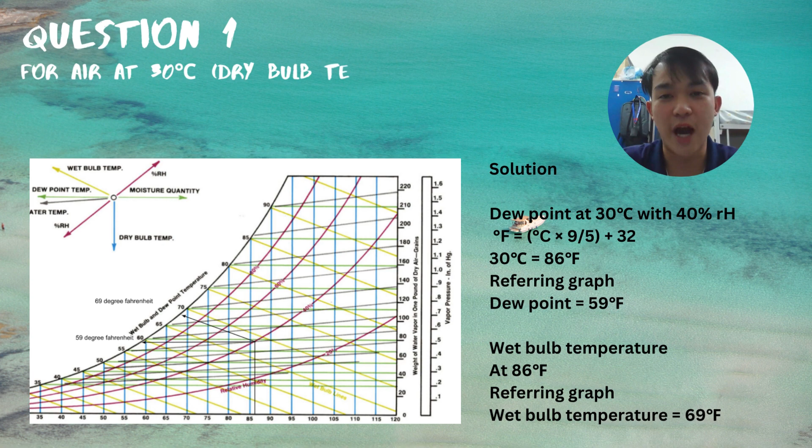So, today I would like to share a topic with a question related to our Chapter 5, Humidification. So, let's look into our question. For air at 30 degrees Celsius, which is the dry bulb temperature, and 40% relative humidity, by using the humidity chart, find the dew point and wet bulb temperature.

So, before moving forward to our solution, let's gain some knowledge about what exactly dew point and wet bulb temperature are. Dew point basically refers to the atmospheric temperature below which water droplets begin to condense and dew can form, while wet bulb temperature is the lowest temperature achieved by the adiabatic evaporation of water in the air until the air is saturated. So, without wasting any time, let's move into our solution.

So, we can see on the graph there are a lot of lines, but I want you all to notice the dew point, which is the green line pointing towards the left, and the wet bulb temperature, the yellow line pointing 315 degrees upwards. So, dew point at 30 degrees Celsius with 40% relative humidity. By using the formula Fahrenheit equals degrees Celsius multiplied by 9/5 plus 32, we get 30 degrees Celsius is equal to 86 Fahrenheit.

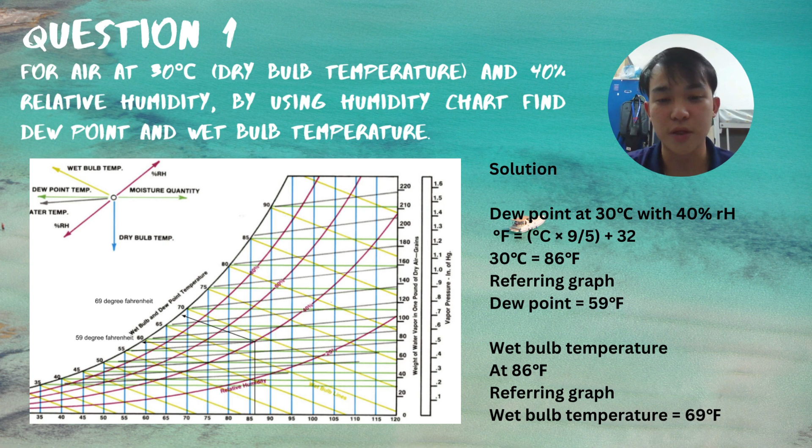By referring to the graph at the intersection point between 86 Fahrenheit and 40% relative humidity, we get the dew point equal to 59 Fahrenheit. For the wet bulb temperature, at the same intersection point between 86 Fahrenheit and 40% relative humidity, pointing 315 degrees upwards, representing the yellow line we can see above. So, referring to the graph, the wet bulb temperature is equal to 69 Fahrenheit.

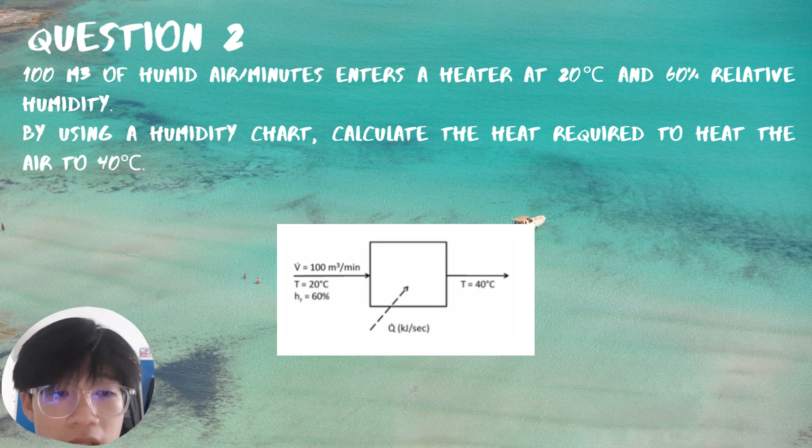In question number 2, the value we have to find is the heat required for the whole process. The formula we use is Q equals mass flow rate of dry air times the change in enthalpy. So first, we have to find the change in enthalpy, which is enthalpy out minus enthalpy in. For the enthalpy in, the information in the question is 20 degrees Celsius with 60% relative humidity. For the enthalpy out, the information is 40 degrees Celsius only.

So firstly, to find the enthalpy in, we draw a straight line from 20 degrees Celsius dry bulb temperature, going up from the x-axis until it reaches the 60% relative humidity curve, and from the intersection we draw up-left until it reaches the enthalpy at saturation scale to get the enthalpy in.

Remember that our inlet air is not saturated; it is only 60% saturation. So we have to account for the enthalpy deviation, which is the curve beside the intersection point, between negative 0.1 and negative 0.2. So we take the middle value, which is negative 0.15. So 43 plus negative 0.15 gives 42.85 kJ per kg of dry air.

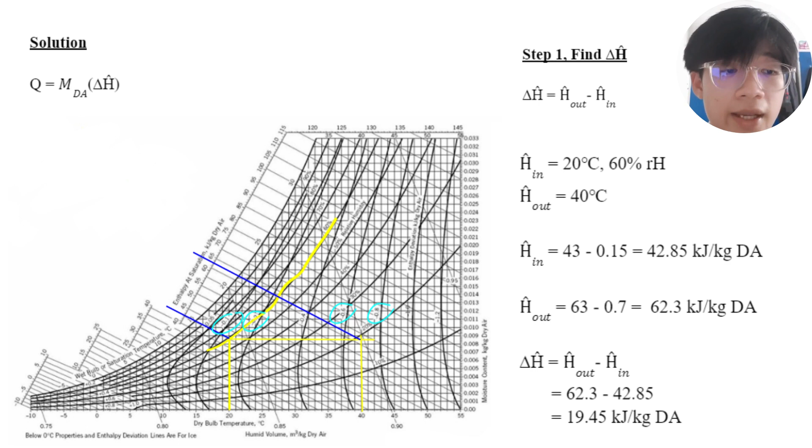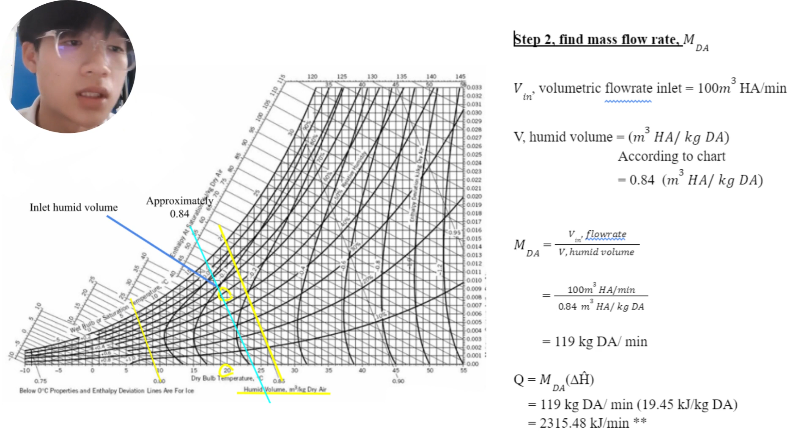And step 2, we have to find the mass flow rate of dry air. So first of all, the value that we got in the question is the volumetric flow rate of inlet, which is 100 meter cube of humid air per minute. The unit for the humid volume is meter cube of humid air over kilogram of dry air.

So according to the chart, the first point that we plotted in the first chart is 20 degrees Celsius with 60% humidity. The humid volume is approximately 0.84 by comparing the two humid volume scales on the chart, which are 0.85 and 0.80.

And then the formula for the mass flow rate is volumetric flow rate of inlet over the humid volume. So the volumetric flow rate is 100 meter cube, and the humid volume is 0.84. So 100 divided by 0.84, we got 119 kilogram of dry air per minute.

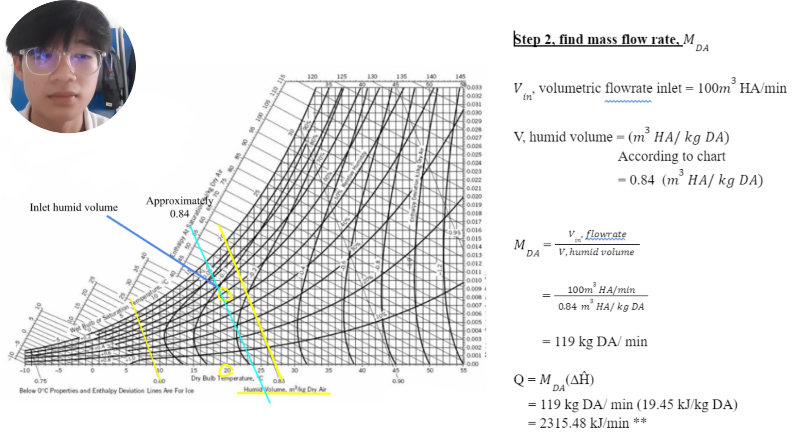So for the last part of this question, we have to calculate the heat required for the process. So Q equals mass flow rate of dry air times the change in enthalpy. So 119 kilogram of dry air per minute times 19.45 kilojoule per kilogram dry air, we got 2315.48 kilojoule per minute. So next one will be question 3.

So 50 meter cube of humid air per minute enters a heater at 25 degrees Celsius and 50% relative humidity. By using a humidity chart, calculate the heat required to heat the air to 45 degrees Celsius. So first of all, the mass balance diagram is drawn to show the whole process. It's similar to question 2.

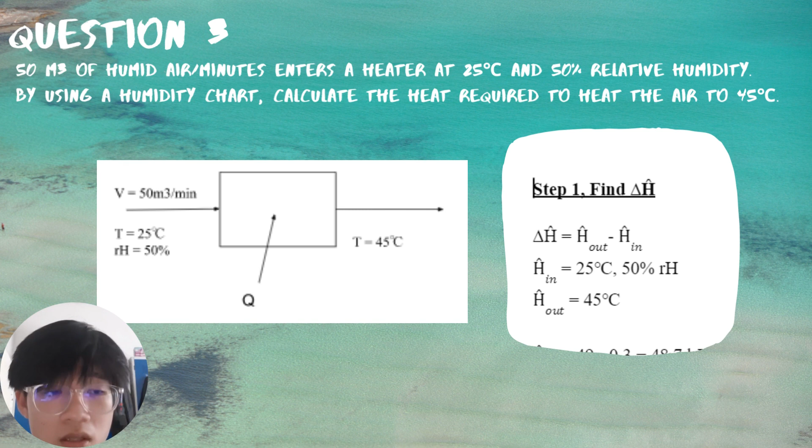We start with finding the change in enthalpy. So change in enthalpy is enthalpy out minus enthalpy in. The information we got from the question for enthalpy in is 25 degrees Celsius and 50% relative humidity. For enthalpy out, we got 45 degrees Celsius. So to find the enthalpy in, the first thing we do is the same as question number 2.

We have to draw a straight line from 25 degrees Celsius on the dry bulb temperature axis up until it reaches the relative humidity curve of 50%. So from the intersection, we draw up left to the enthalpy at saturation scale. So the enthalpy in we got is 49.

Since this case is not fully saturated, it is only 50% saturation, we have to account for the enthalpy deviation, and our point stays between negative 0.2 and negative 0.4 of the enthalpy deviation. So we took 0.3, which is 49 minus 0.3, we got 48.7 kilojoule per kg of dry air.

So for the enthalpy out, we have to draw a horizontal line from the first intersection point to the right, and we draw 45 degrees Celsius up from the dry bulb temperature until it reaches the horizontal line. So from the intersection, we draw it to the left until it reaches the scale of enthalpy at saturation,

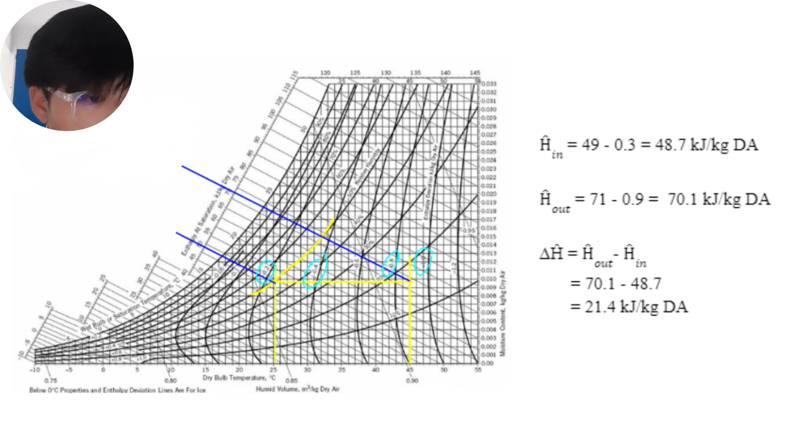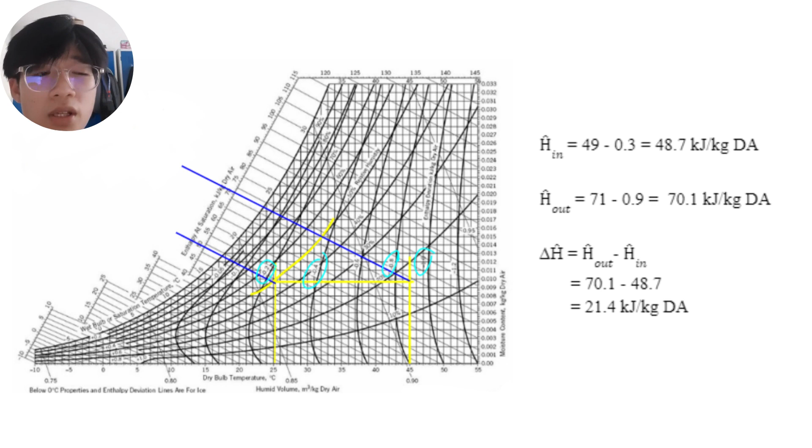and the value we got is 71. To get the accurate number, we have to account for the enthalpy deviation, which stays between 0.8 and 1.0. So we took 0.9 as the enthalpy deviation. So 71 minus 0.9, we got 70.1 kilojoule per kg dry air. So to get change in enthalpy, 70.1 minus 48.7, we got 21.4 kilojoule per kg dry air.

And for step 2, we have to find the mass flow rate, and the info we got is volumetric flow rate inlet 50 meter cube of humid air per minute. For the humid volume, our point stays between 0.85 and 0.90. So after we compare with the two lines, the humid volume we got is 0.86 meter cube of humid air per kilogram of dry air.

So to find the mass flow rate, we use the formula volumetric flow rate over the humid volume. So 50 meter cube over 0.86 meter cube of humid air per kilogram of dry air, we got 58.14 kilogram dry air per minute.

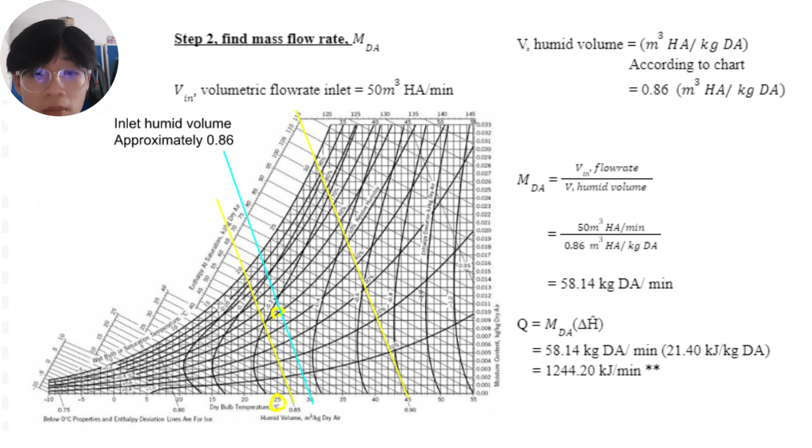So lastly, to find the heat required for this process, mass flow rate times the change in enthalpy. So 58.14 times 21.40, we got 1244.2 kilojoule per minute. That's all for me.